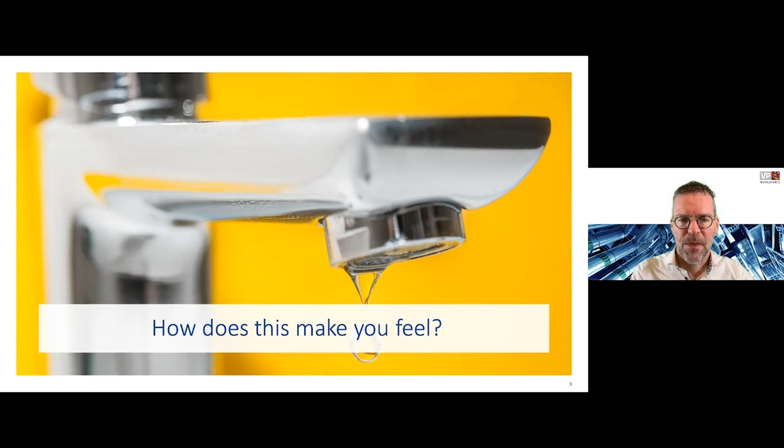Lately, I was traveling to a client, and I had to use the airplane, unfortunately. Yeah, that is, of course, a very bad CO2 footprint. But I thought, well, let's make a little calculation here. What would be the equivalent of compressed air that I would need to save to compensate for my flight? Now, let's do the math.

If you take a 40 kW compressor, it equals around 960 kWh per day. And if you take the average emission factor, for example, the US average emission factor, it would sum up to 355 kilograms of CO2, of carbon dioxide, in 24 hours. If you look at the return ticket Amsterdam-Paris, it's about 315 kilograms. So basically, you can compensate your next flight to your client or to your colleague by turning off a compressor.

But you will probably wonder now, okay, that's nice, but how am I going to do this? Well, let's take a look in the next part of the presentation, where I will explain how you can do this systematically and how you can keep your energy consumption at the lowest possible level.

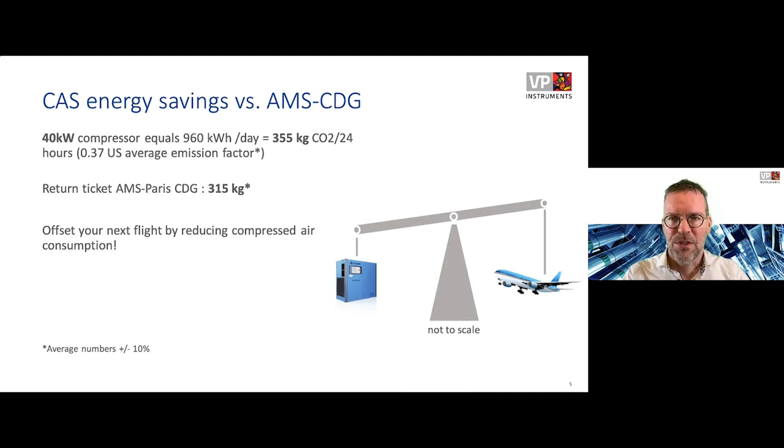But first, why compressed air? Why would you start saving compressed air in your plant? Compressed air is about 8 to 10 times more expensive than the equivalent electric energy consumption. And in an average plant, it's 10 to 30% of the electricity bill. It holds a huge potential for energy savings, and there is a lot of low-hanging fruit, which is nice. So you can save a lot, but be aware, it tends to grow back on you if you don't monitor it properly.

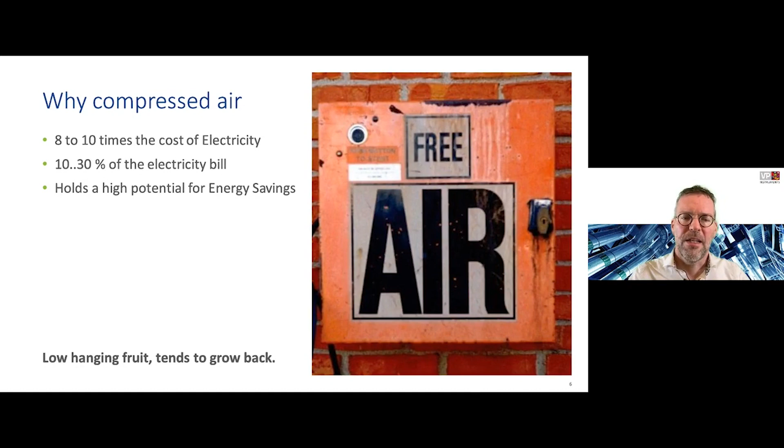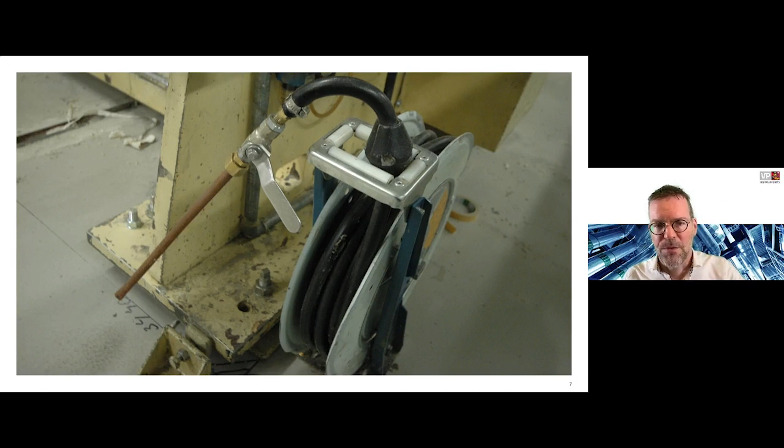So this kind of low-hanging fruit is quite easy to resolve. Buy a good air gun with an air amplifier, or even better, take a broom next time to clean off the machine, and don't use compressed air at all. Other examples that we find in production plants are things like this. This is obviously not good.

And if you look further into the system, this is really an indication of very poor maintenance, so there are probably a lot of other issues as well. So sometimes just walking around these plants, you can find a lot of this typical low-hanging fruit and things you can improve.

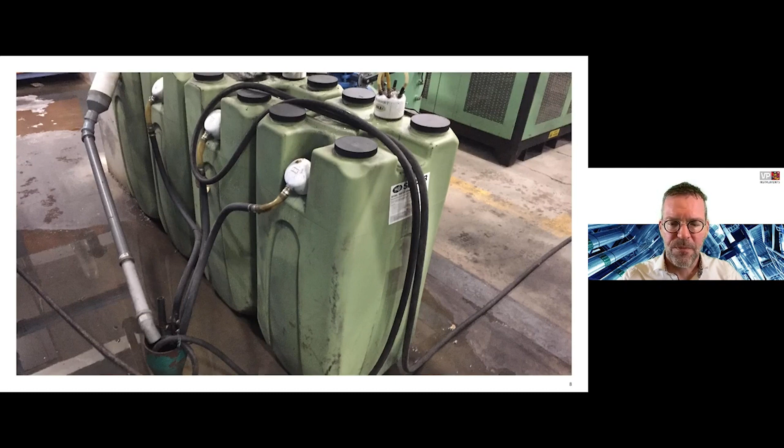But you should go there because there is a lot of savings also to be found in the compressed air room. And then if you look at the demand side, you have the machines, you have the people that use compressed air, and it's all being interconnected by a pipe system. And also on the demand side, you can find a lot of saving opportunities. I will come to that later.

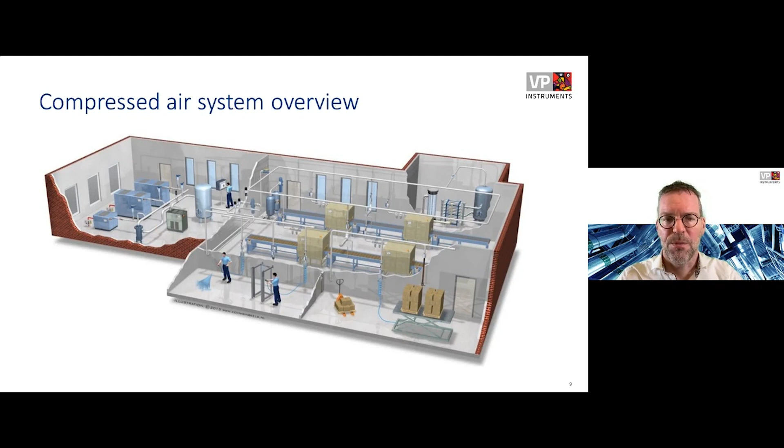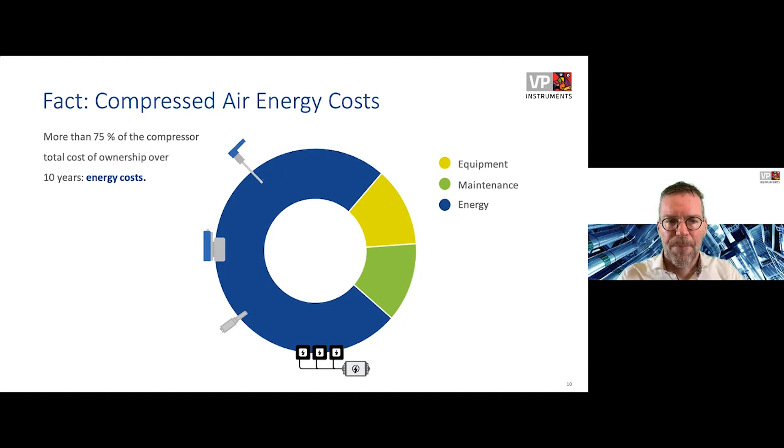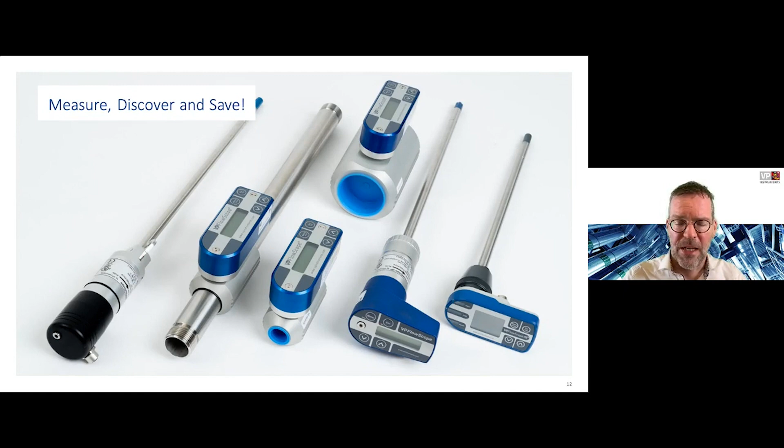Some more examples. This is a cocoa factory. In this case, they did an audit. They installed a flow meter on some main lines, and they found out that the efficiency of the total compressed air system was not that great. So they did some optimization of efficiency, but last but not least, they also reduced leakages on machines. And this really was the biggest eye-opener. 50% of the compressed air was basically wasted in one of the cocoa presses. And they were able to fix those leaks.

And at the same time, the speed of that machine went up, so they could also increase the production. So in the end, 14,000 euros per day increase in production capacity. No capital investment in a new machine. They could basically grow the production with the same machines. And they also saved in excess of 125,000 euros per year on the compressed air energy consumption.

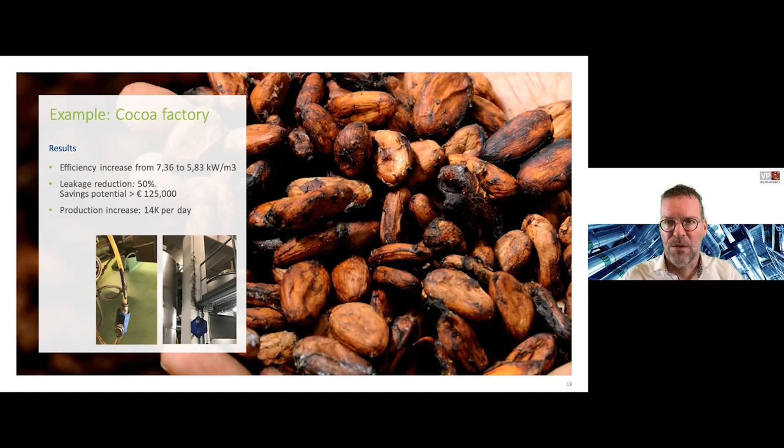Another example is a car manufacturer where they installed a control system to optimize the compressor controls. In this way, they were able to also save a lot of money on their energy bill. They were able to stop some compressors from blowing off air to the roof, and they were also able to absorb large peak demands by using a big receiver. Total savings, almost 600K per year.

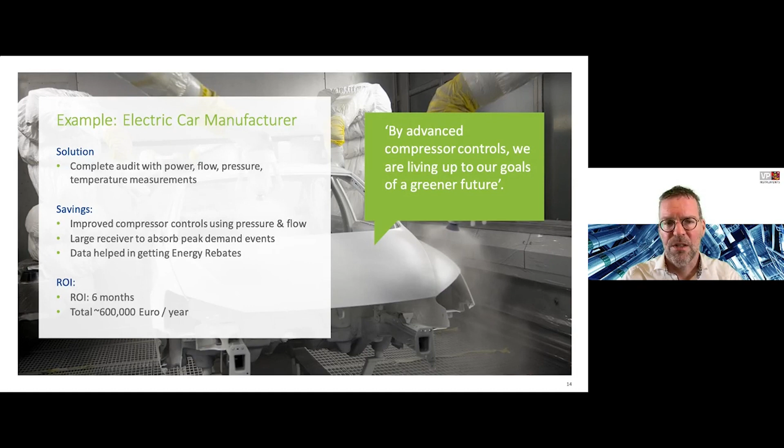So what's the value then of measuring and monitoring compressed air? Well, with measuring and monitoring, you can detect waste on time. You can benchmark machines, or you can even benchmark entire plants and compare one plant to another. You can optimize service intervals, optimize maintenance, and you can also understand the impact of new production equipment. If you buy maybe 2 other machines, what will be the impact on the compressed air consumption? What will be the impact on your electricity bill in the end?

So it really is a source of valuable data for investment decisions. And last but not least, the data can also be used to get rebates from government. For example, in some countries, you get money from the utilities to save energy on your compressed air.

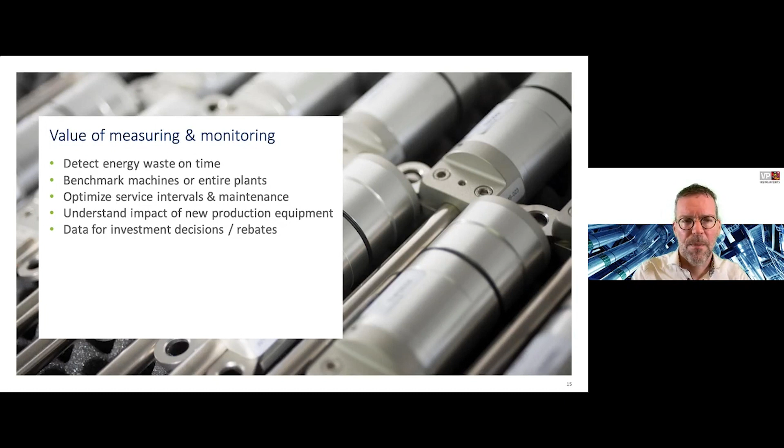So how does an energy management system look? Basically, it's a collection of sensors that you put on crucial spots in your compressed air system. For example, you will measure the power consumption of the compressor. You will take dew point. You will take consumption from some production lines.

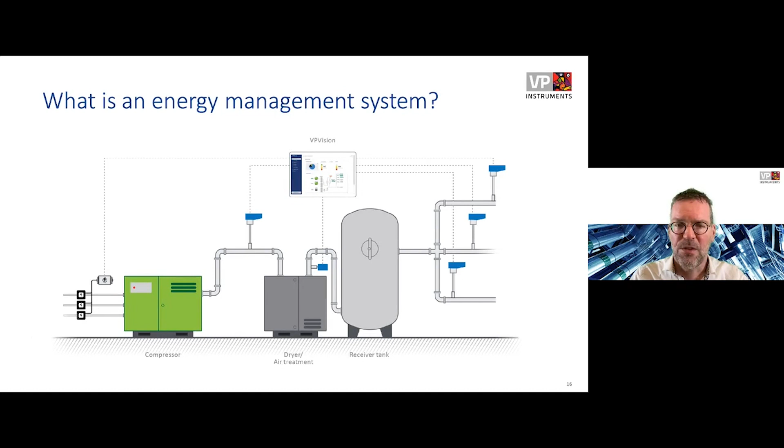And it's all being collected nicely in a simple, easy to use dashboard where you can basically see KPIs. You can have alarms. You can get reports, which will help you basically to make your daily decisions on where to optimize and where to save.

So how do you start? We advise always to take a sort of stepwise plan, which starts with a quick scan. And during the quick scan, you will do basically a walkthrough to your plant. You will talk to some people, ask about maybe problems they have with production. And very important, you will monitor also the main consumption of the plant using a flow meter that can measure flow, pressure, temperature, and can data log also that data.

Now, after this quick scan, you start to analyze that data and discuss it with your team and basically rank your savings top 3. You might find out, for example, that during the lunch break or during shift change, there is a lot of base load consumption, which indicates that there is leakage. So you might want to start with a leakage campaign to fix those leaks.

Then you start to implement those three things, the top three savings measures. So you start with fixing the leaks. Maybe you will change the air guns, which I showed in the beginning of this presentation, that you will take more efficient air guns, or you will eliminate completely the air guns and buy some brooms. Maybe you find out also downstream that there is someone using air for cooling, where you can take a blower instead of using 8-bar compressed air to cool some kind of process.

And last but not least, you will also install a permanent monitoring system. And this can be a small system, just to measure the main consumption and the generation side, so it's to measure the compressors. But this permanent monitoring system is really crucial because this will help you to go back to step 1 and do your quick scan again and again over time. Because this should be really a permanent process backed up by permanent monitoring. That's really key to this.

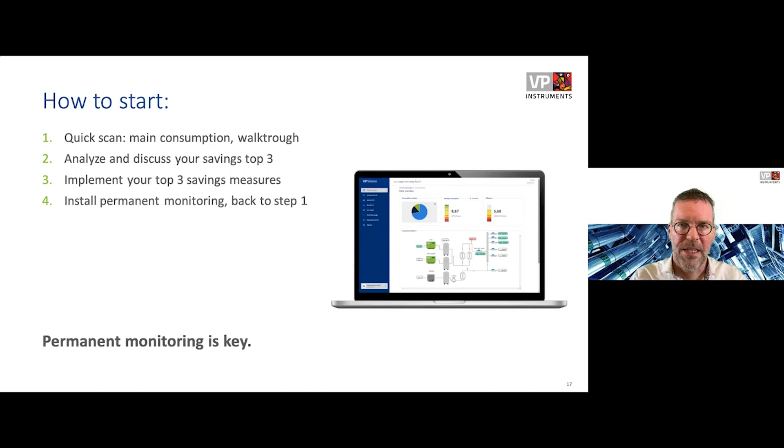So you can start really small. Basically take a flow meter with integrated data logger that reveals leakage. It can record the nominal consumption. It can record peak consumption. It helps you to specify machine capacity. It can reveal pressure issues on the demand side or on the supply side. And it can also detect reverse flow.

Sometimes you will find out that the air is not flowing from one side to the other side of the production area, but it might reverse because there are multiple compressors, for example, on multiple locations in the plant.

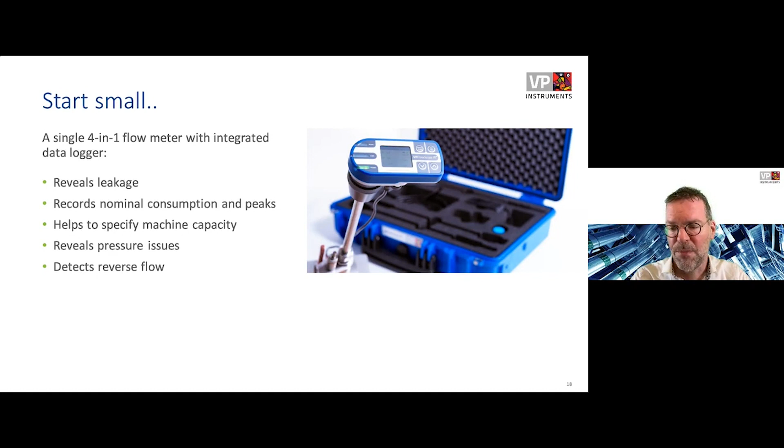And it's very important to start downstream. You will find most of the savings normally downstream. You will find excessive consumers of air. You will find pressure issues, which you can easily resolve sometimes by buying a receiver tank near the process that needs a little bit more air at some time of the day. You will find these inappropriate uses, the air guns or open blows. And also you can find maybe some applications where you can use a blower instead of compressed air.

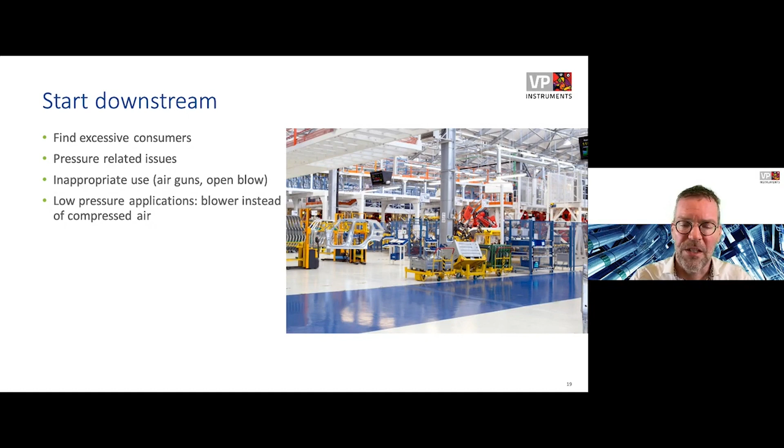So to conclude, why is compressed air your hidden gold mine? Well, it can reveal savings between 10 and sometimes even 50% of your electric energy bill associated to compressed air. There is a lot of low-hanging fruit. The return on investment is often less than 12 months. And permanent monitoring is really the key to continuous energy savings.